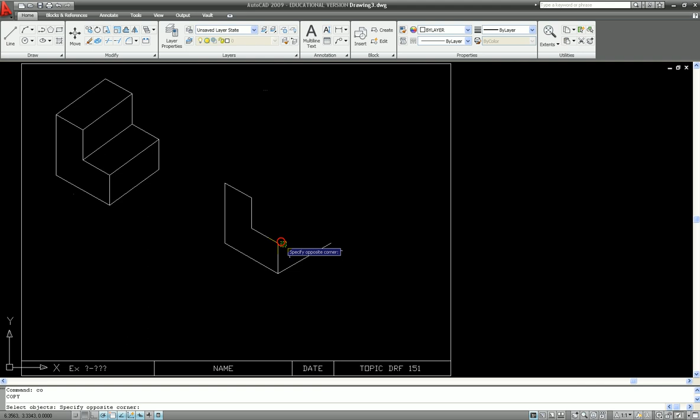Now I want to create this line right here, so I'm going to go along this 30-degree axis, and that is going to be 1.5. Now, what I have here is my front face and the beginnings of the right side. Well, since this thing is the same on the front side and the back side, what I can do now is copy each of these lines from here to here. And what that gives me is the profile for this side.

I can then just draw lines to fill this in. And you can see this object now looks like the picture in the book. So I'm going to go ahead and erase the picture of the book so that we can work with this one a little bit more.

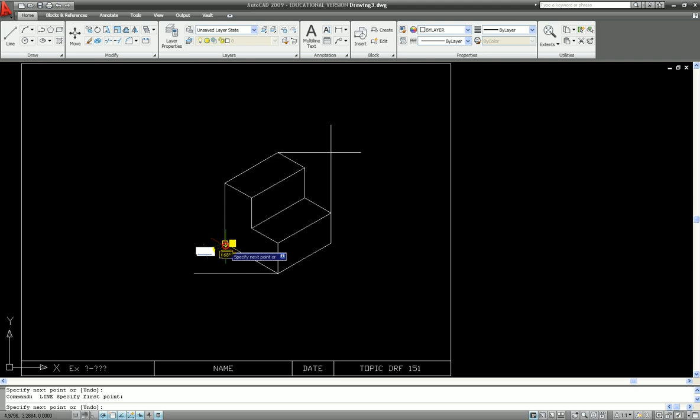What I want to do now is center this. And just like previously, I'm going to go from the highest point and the rightmost point, the lowest point and the leftmost point, and I'm going to draw a diagonal line. And then we will have another diagonal line that crosses our border. Now I can move all of this from the midpoint of the small line to the midpoint of the big line, and now I have a centered isometric drawing, so I can get rid of all of my reference geometry.

Now I need to go to the dimension layer, and the dimensions for this object are going to look kind of weird at first, but once you get used to seeing it, it won't be as bad. So what I need to do is aligned dimensions. So it's DAL for aligned dimension. The reason for the aligned dimension is so that it actually picks up the correct distances. So there we have our 0.75 there and our 0.75 here.

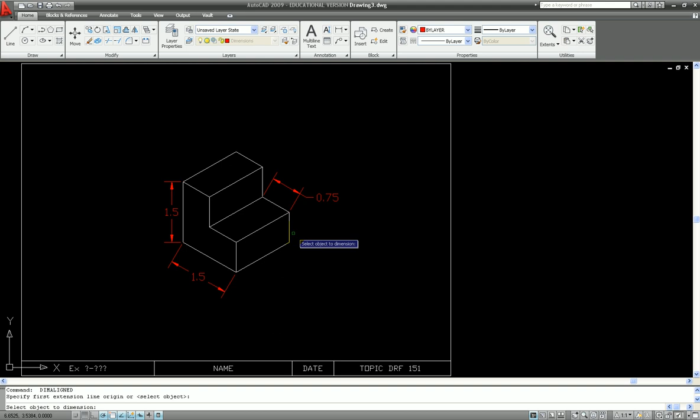Now I'm not concerned at all about the placement yet, because there is something else that I have to do before I can go any further. On my Annotate tab, in my section for dimensions, if I click on this little drop down right here, I have a button. This button is called oblique. When I click on this button, it's going to ask me to select a dimension or select objects. I will pick this one right here.

And you can follow the book for this week, but as time progresses, you're going to want to go a little bit more to what you're used to, or have to figure these out a little bit more on your own. But after I select that object, I can right click. Now it wants me to enter the obliquing angle. Well, the book has it coming out at the 30 degrees this way, so I can just click 2 points that represent that angle, and what it does is it sets it out to be oblique. Now I can go right back into that command, click on this dimension.

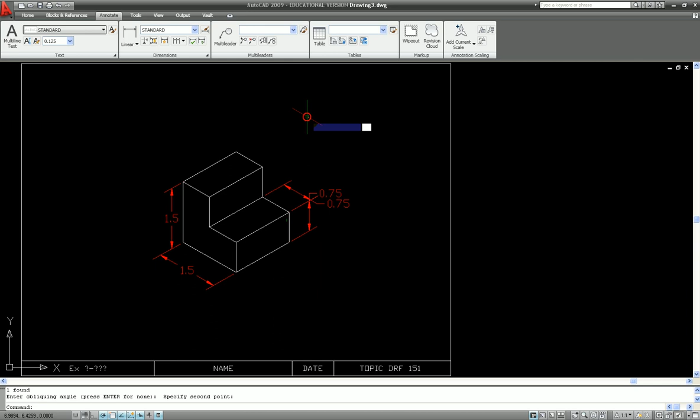I want this dimension at this angle, oblique this dimension along this angle, and oblique along this angle. Now that I have everything obliqued, I can clean it up a little bit, and I can make the endpoints match up here. I can move this 0.75 so that it's on the other side, perhaps a little bit clearer and easier to understand. Same with this one right here. I can pull that out of the way and then line up these two dimensions.

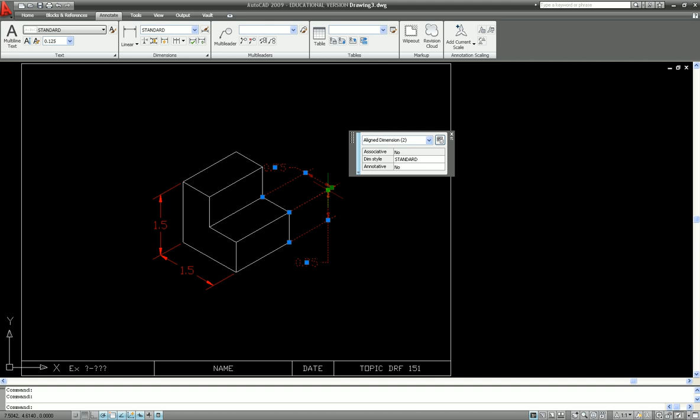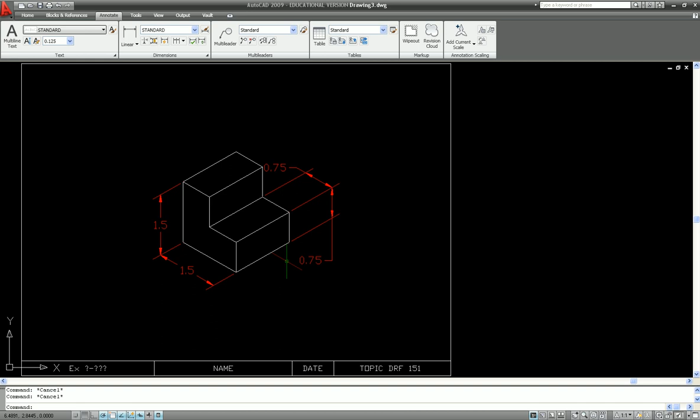So with the obliquing, these dimensions are now set up on an isometric plane. So this is what you're going to be doing for this week's assignments. This is exercise 5-1, and I'm going to post videos for 5.3, 5.5, and 5.7 as well. But this is what your final product should look like when you turn in 5-1. One view, isometric, with dimensions, obliqued, everything on the correct layers. There are no hidden lines in isometric drawings.